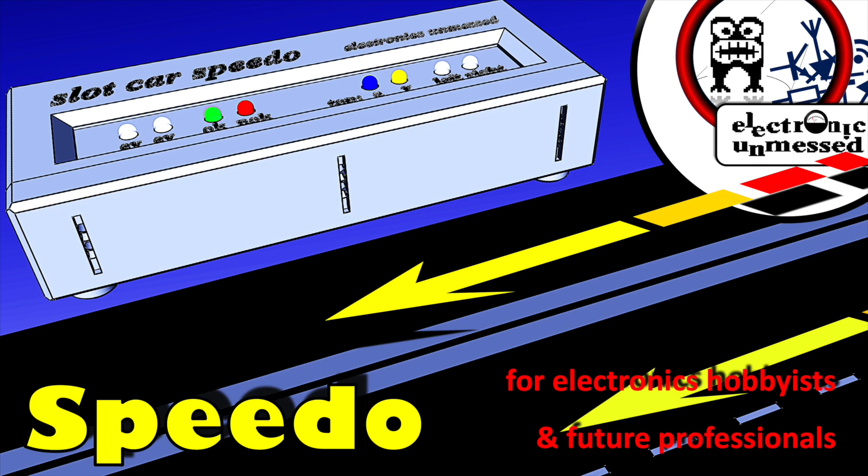With this gadget you can actually measure speed and acceleration. Today we are designing the casing for 3D printing and we will test it.

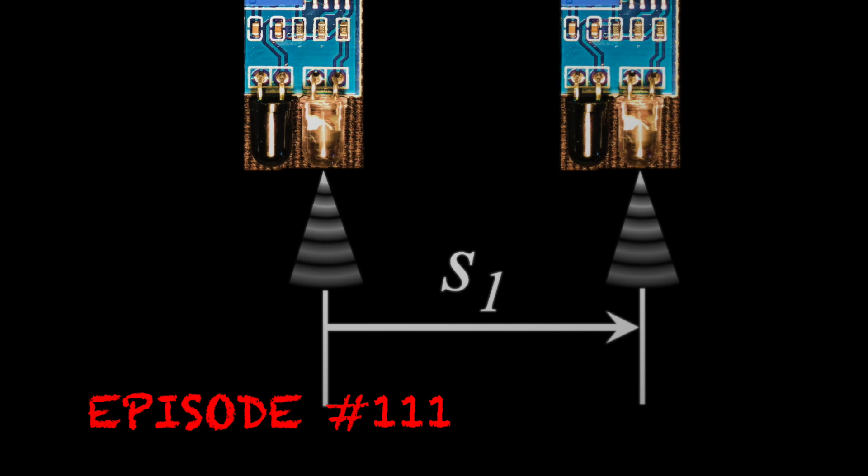There are a number of suggestions on how to measure the speed of a vehicle. Utilizing the signals from two sensors, the speed is calculated from the distance between the sensors divided by the measured time. No doubt about it, this is a resilient method.

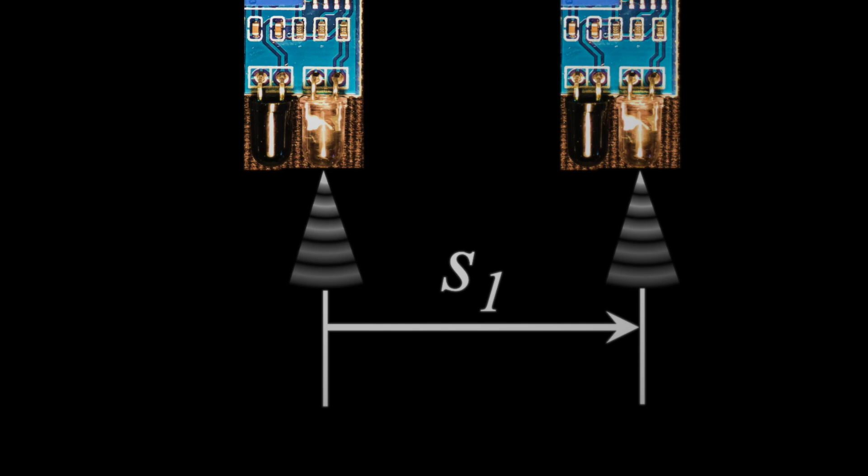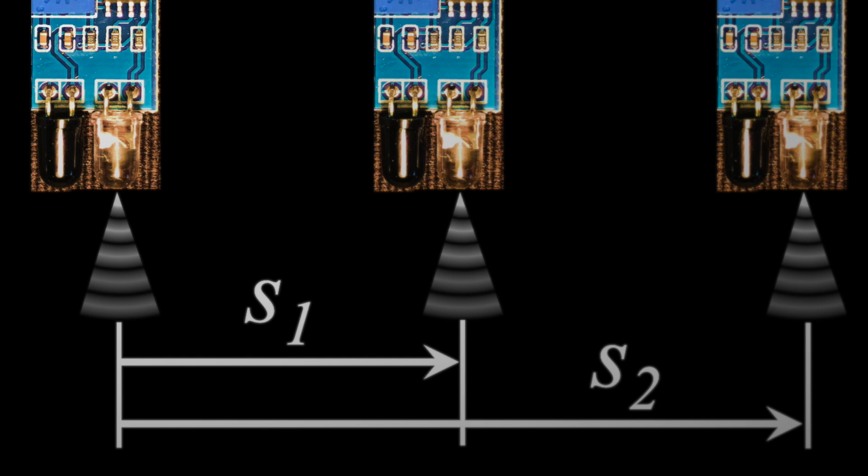But we want more at Electronic Unmessed. We want to measure the acceleration too. We are using 3 infrared sensors instead of 2, and we derived the math equations for that. There is an earlier video on Electronic Unmessed explaining the math, the electronics and how to query the sensors using a fast interrupt routine in the code. Definitely a must-see in case you are interested in this topic.

Our first measurement results with a cardboard prototype were encouraging, even when its structure was a bit wobbly. That's why we decided to build the Speedo with a solid case.

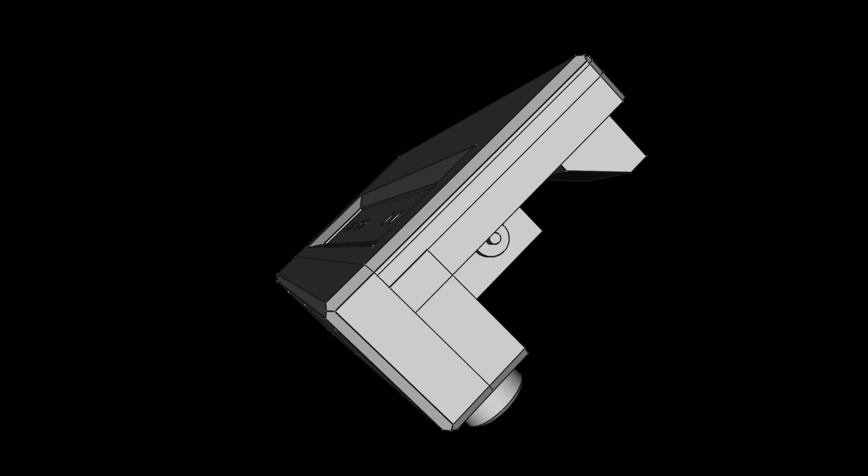Our requirements for the casing are mainly motivated to improve the measurement accuracy. The housing must be mechanically stable and the defined sensor distances must be precise. If possible, the distances should be slightly larger than with our cardboard box prototype. We are designing slit apertures for the sensors to make their measuring cones narrow. All these measures give us more precise trigger points for the sensors, improving the measurement accuracy. We may need to adjust the sensitivity of the infrared sensors on the racetrack, which is why the housing should be easy to open and close.

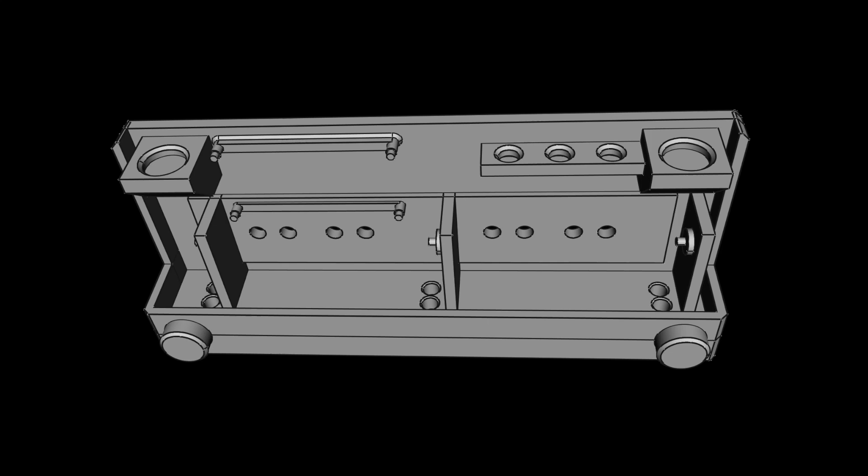I really enjoy working with FreeCAD and I'm trying to get better with each new project. The upper part of the housing is carrying the complete electronics. The 3 infrared sensors are attached here, and below we see the holes for the sensor LEDs. Then we have a base for attaching the ESP32 board and a bar where we can tie cables.

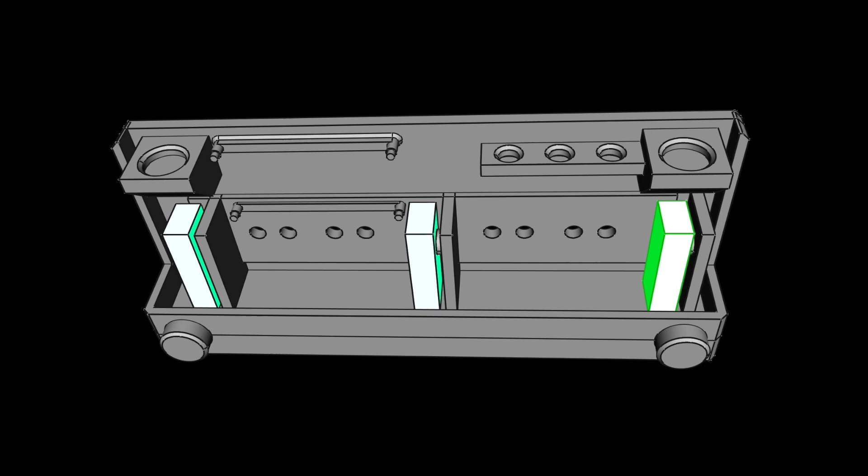Here comes a little trick. I'm using cuboids to represent the outer dimensions of my electronic boards. This is really helpful when designing the casing.

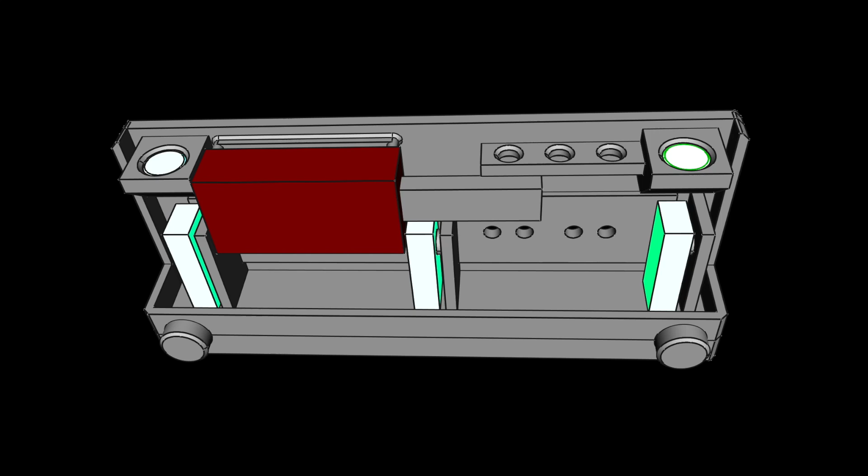We use magnets that we are gluing here to hold the casing together. This method is proven already with the housing of our slot car lap counter. We can conveniently open and close the casing later. These are the magnets in reality. You can buy them for little money. Of course, the magnets have a counterpart on the other part of the housing.

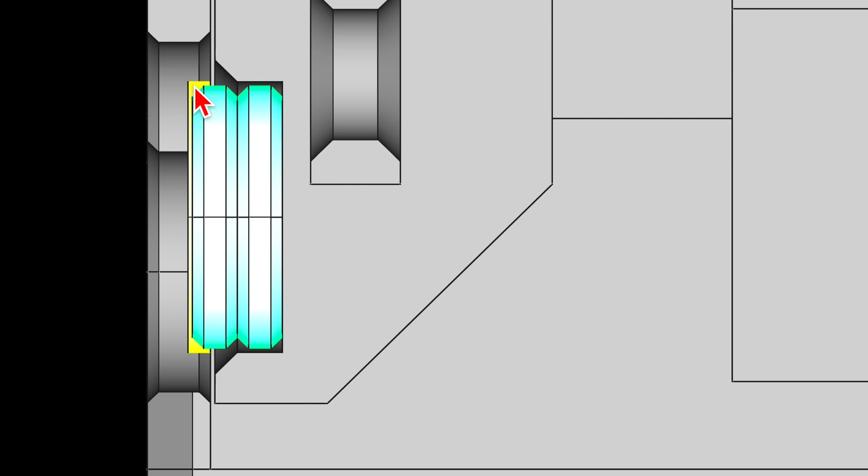I'm using the following trick so that the parts fit together exactly. You first glue the magnets on one side of the casing and let the glue harden. Then stick a thin piece of tape on the part to protect the other housing from the glue. Next, you put the magnets on top of each other. Then take the other housing part, put some glue in the recesses provided, and press the 2 housing parts firmly together. Once the glue has hardened, you can open the case and remove the tape.

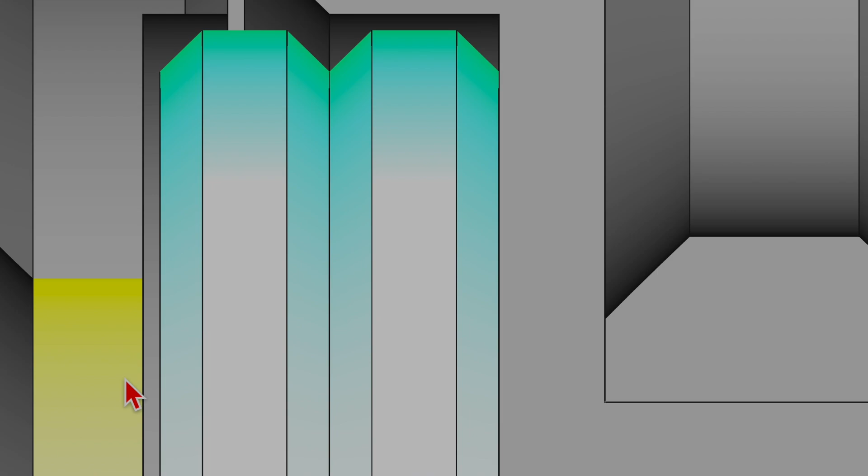Maybe I exaggerated a bit using 8 LEDs, and we might not need all of them. However, I want to use the LEDs for visual feedback to the racing pilots, because there will be a number of features that we don't want to reveal yet.

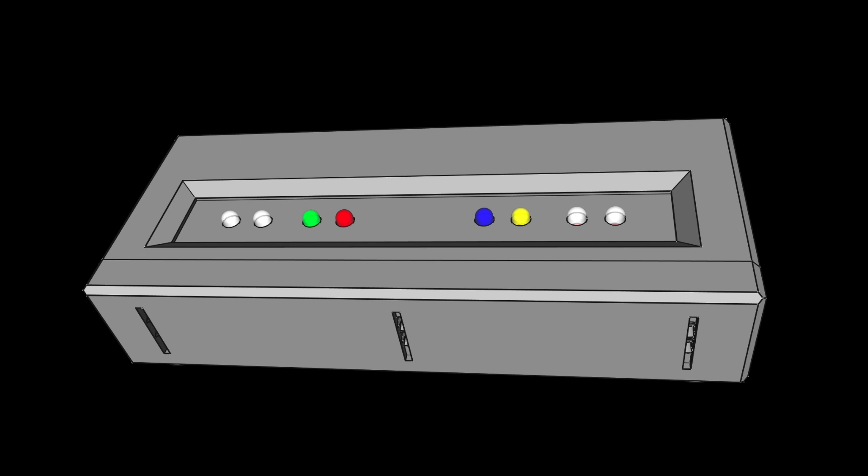I'm trying something new with the text extrusions, actually a nice way to label the housing. Let's see what this looks like in reality. What do you think about that? Write me in the comments.

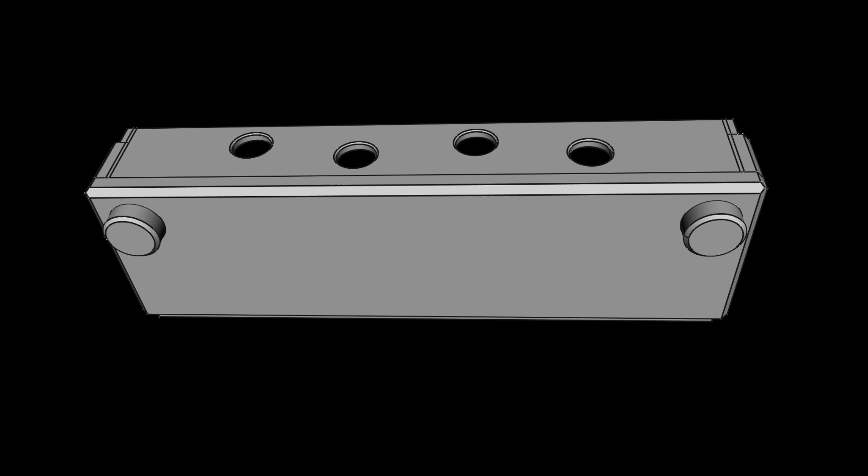Then we take a quick look at the lower part of the casing. Of course, I'm excited to see how my extruded logo will look in reality. Inside we can see two recesses where the magnets will go in.

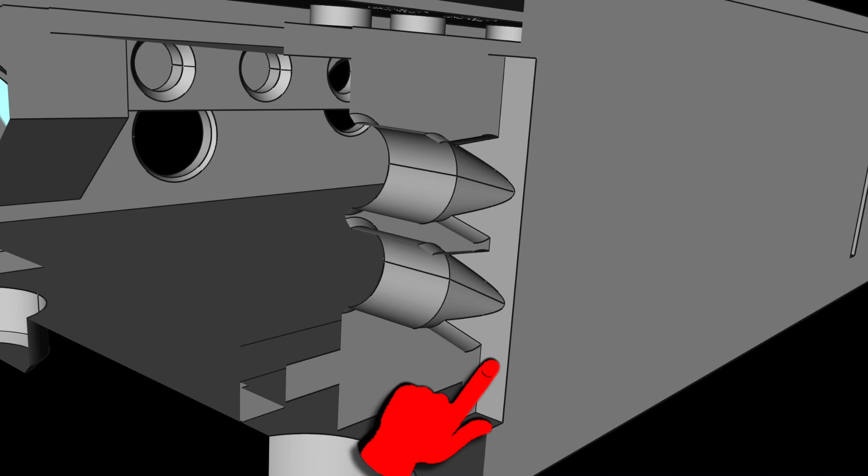Okay, now I need to show you the apertures for the sensors, where I put in some brain power. The infrared diodes are inserted into the round holes, which are merging into cone holes. The cone holes merge into a slit, limiting the incidence of infrared light horizontally. With the long slit, we don't have vertical restrictions for the infrared sensors. As mentioned before, this is giving us a definite trigger point for the sensors.

I'm demonstrating the magnetic closure now. It really works well, doesn't it? What do you think about this method? Tell me in the comments.

Now comes the answer to the burning question: is the 3D printed casing bringing an improved measurement accuracy? By the way, you're currently seeing the power on process and connecting the Speedo to a PC via Bluetooth.

Although we could not verify the speed measurement accuracy yet, we're convinced that it is fairly accurate. However, we are not so sure about the acceleration measurement, because this is where all three sensors' inaccuracies are adding up.

But look at this. We repeat the gravitational acceleration test that we already carried out with our cardboard prototype. The results for the acceleration are reproducible. They deviate only 3% maximum. The result in absolute values also seems very plausible to me, because we are measuring 93 to 96% of the gravity acceleration.

You noticed that I'm revealing one of the measurement reports in advance that you can receive via Bluetooth and record on a PC.